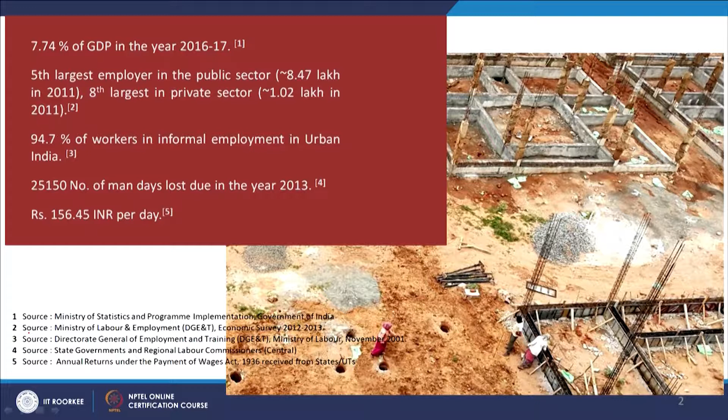If you look at construction as an industry, it accounts for 7.74% of the GDP in 2016-17, and this is the fifth largest employer in the public sector and eighth largest in the private sector. You can see here about the informal workforce: 94.7% of workers are in informal employment in urban India. This is a brief statistic about the kind of informal sector working in these activities. It's not only construction; people work in urban sanitation, in operations and maintenance. So there's a huge segment.

Construction is one of the important segments. That is where we can see the physically woven city, the newly built clusters, demolitions and new additions. But who are making it for us? But where do they live? The way they are making us nice houses, but if you look at the way they live and the dynamics of their housing patterns, it is really shocking.

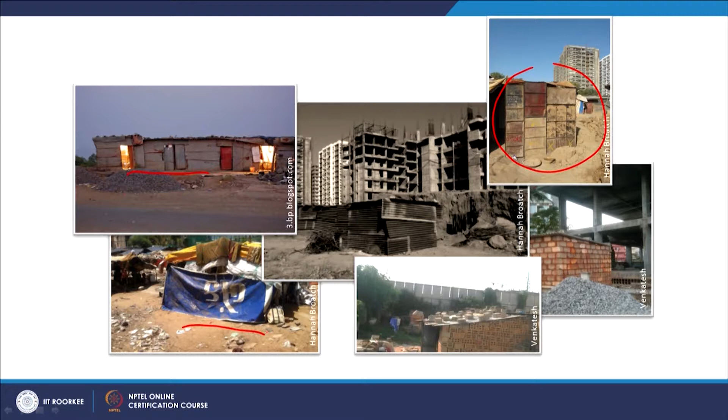What you can see here is construction workers' housing near the project sites. Some are made with shuttering sheets, some are tin sheds, completely like a slum, and some are very temporary structures. In a few places you can find brick so that it could be reused again further. So these are the variety of shelters which you will find.

If you look at the duration, that is again a temporal framework, because it depends on who they are, for what purpose, whether they are skilled or unskilled labor, and how long they'll be on this project. So everything has its own dynamic. How can one understand this whole dynamic situation?

This is where one of my students, Venkatesh Arunachalam, developed his master's dissertation on design strategies for construction workers' housing. This is a recently completed thesis, and I'm showing this because it gives a better idea of the methodology he implemented to understand construction workers' housing and its dynamics, and the potential actors who play in it, as well as various external and internal influences on how it shapes the dynamic environment.

So it not only provides a way to look into it, it also introduces various dimensions: one, how it's not just the architectural dimension that has control of it, there is much beyond it. That is where Venkatesh looks into it, how he collates all the information and triangulates it with one another, and how he develops the design strategies. Instead of showing specifics, I just want to introduce my own student's work, where he developed a very intensive study, especially in an Indian context.

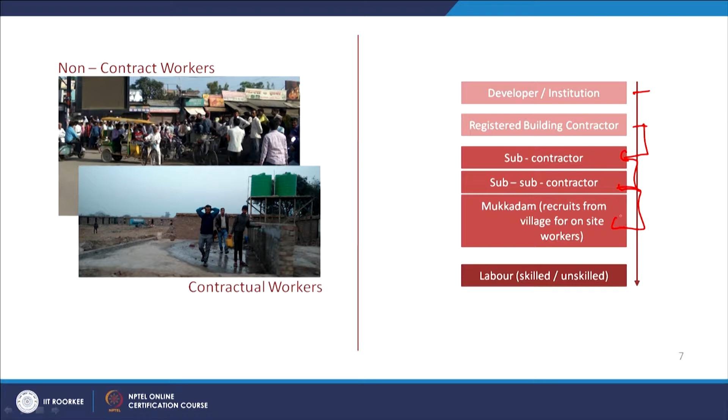For example, in many cases, a group of 100 workers is brought from a Bihar village or some other place in Bengal or Orissa, and the Mukkadam is the leader within the group of villagers. He brings all the men for a period of 2 or 3 months, and they stay here and then go back. They are trained in that particular work, do that work, and go back, and that's how they keep rotating in that whole process.

So there's a kind of local leader who is associated with the contractors and subcontractors, and that is how the whole chain process works.

In terms of social security and living conditions, there are two sides - the off-site provisions and the on-site provisions. For off-site, people tend to reside under flyovers or on pavements or street edges, or they might temporarily stay on government land, or start a new slum altogether. Whereas on-site, they provide a space for these construction workers, which reduces their proximity issues.

A construction worker is aligned throughout the project, but it varies by stage. The first is project conceptualization - once you conceptualize, you know the magnitude of the project, the scale, and the duration. So how can you procure the land? It's not only the land you plan to build on, but how you can accommodate your construction workers - that is also an important aspect.

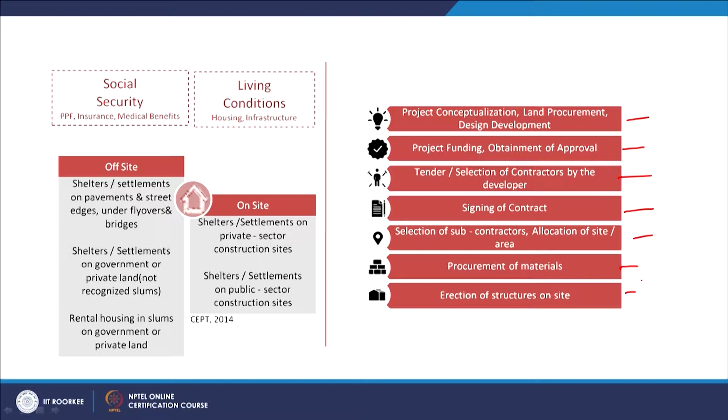Then comes design development, project funding, obtainment of approval, selection of contractors, signing of contracts, selection of subcontractors, allocation of site, procurement of materials, and erection of structures on site. Hannah from CEPT University categorized how you actually tender a project, assign the work, and erect it.

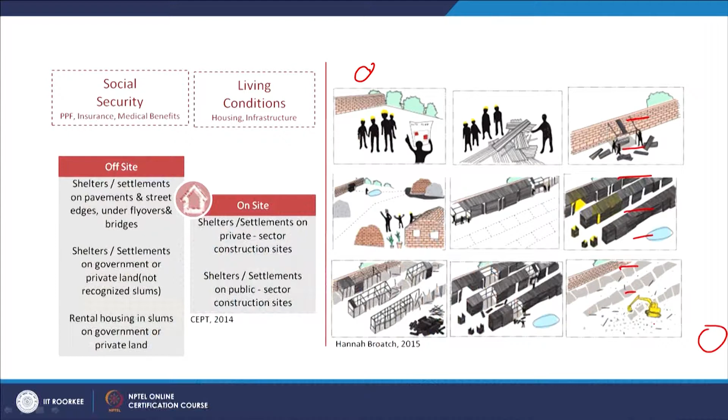This whole process goes from conception of a project to the end of the project and to the demolition of the whole cluster - starting from selection of contractors all the way through. So this is a process.

To understand this, one has to bring the project management dimension into it, because if you really want to work out the logistics, you need to understand what phase of the project it is, what is the duration, and what kind of skilled labor you need at that point - for example, brick masons at the time of structure work, or concrete and shuttering workers.

When I'm talking about construction workers, I'm not talking about specialized carpenters or specialized HVAC people, but the casual labor who does all these mason-type jobs set up by this process.

One has to understand that at the foundation level, foundation to plinth needs a different requirement. From plinth to structure needs a different requirement, then the slab needs a different requirement, and then the finishing of structures - walls, walling material, and the perfect finishes like plaster work - that's a different requirement. And then any kind of services is yet another different requirement.

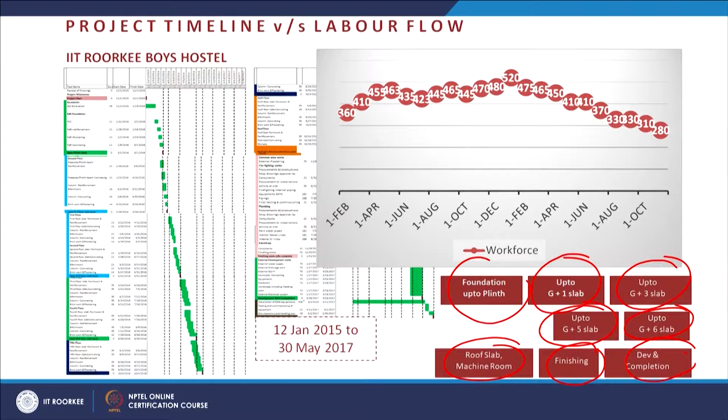So if you look at the inflow and outflow, it goes on from 360, and then it goes up to 520 at some point, and then it comes down, because as it approaches the completion stage, obviously it comes down. So the peak point is when they are actually developing the structures and the whole walling aspects.

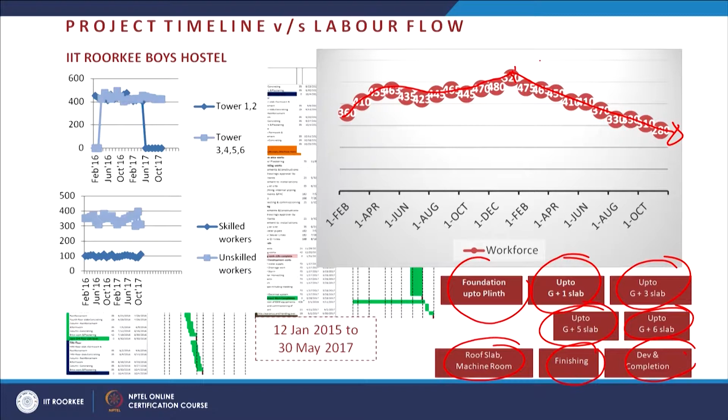And similarly, this is how one has to relate the project management aspect with the timelines. So that is one aspect which Venkatesh tried to look into.

And then when we are trying to address this holistic issue, which was not well addressed so far, one has to look not just at a case study or 2-3 units or any camps and come to a conclusion. So for that, what we did was I asked Venkatesh, and in fact the jury members also asked him, to go back and look at the standards, the basic codes, what our manuals talk about.

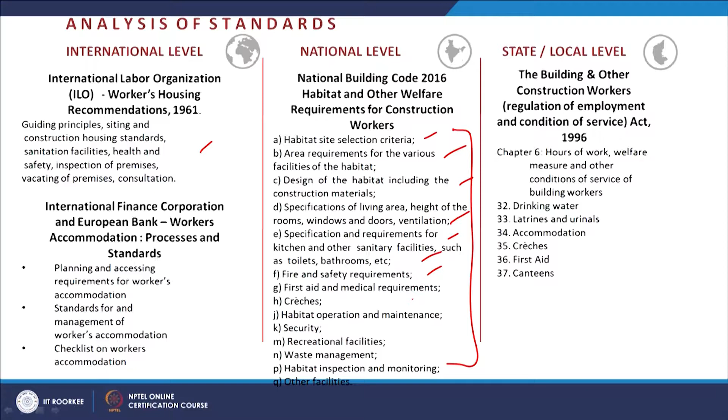So that is where he looked at various standards like the International Labour Organization, how they framed the guiding principles and housing standards, at the same time the NBC, the National Building Code, and how they talked about habitat selection criteria, area requirements, construction materials and areas, kitchen, toilets. And then again you have the Building and Other Construction Workers Act of 1996, which talks about hours of work and welfare measures. So all these we have at the international level, the national level, and the local level.

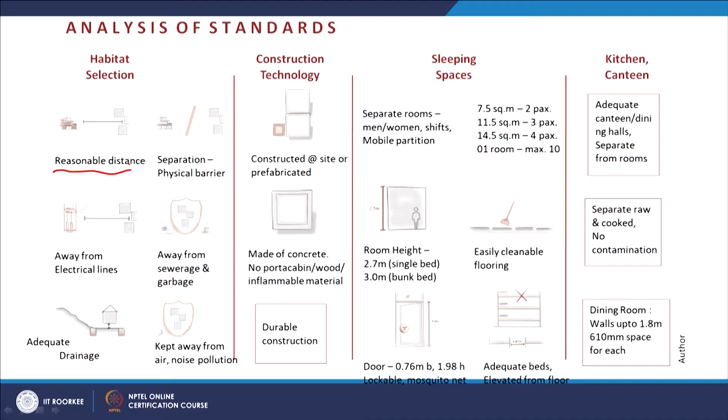But let's see what they are going to talk about. In fact, when we talk about habitat selection, they talk about reasonable distance. So what is reasonable? Is it 1 kilometer, 5 kilometers, 15 kilometers? What is reasonable? These are all more qualitative standards. Now when we say away from electric lines, how far should they be? So this is where one needs a kind of indication that yes, if this condition exists, this is what we need to do.

And adequate drainage - again this is in qualitative terms. What is adequate? How much population? What kind of flow patterns do we have to give? What kind of water storage do we have to give for how many people? So this all talks about numbers, but the reality of these norms doesn't mention much about these precise figures.

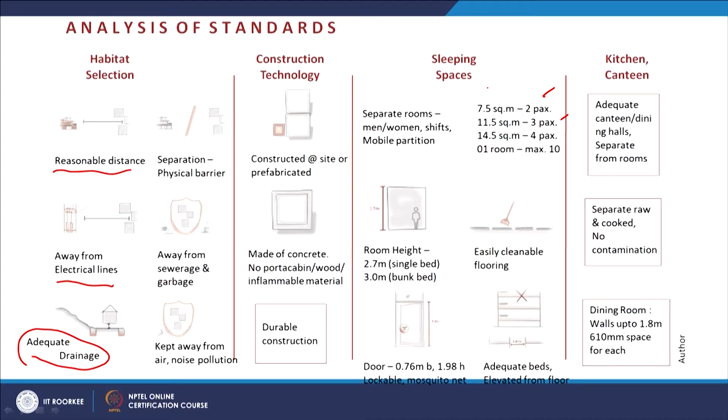As we talk about sleeping spaces, they specify for 2 people 7.5 square meters, for 3 people so much. So basically they have given some broader area requirements, and at the same time they talk about the heights, and again the health and safety aspect of it.

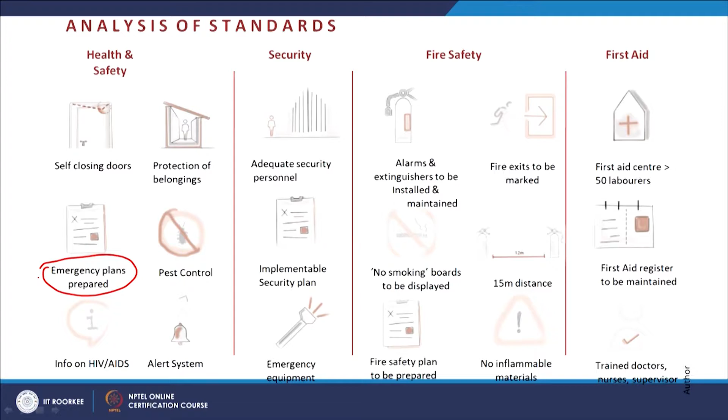So when we talk about emergency plans being prepared - have you ever seen, at least in the Indian scenario, how many of these constructions have emergency plans, how to evacuate if there is a fire or gas blast, pest control, and some information on HIV awareness. So there's a variety of aspects on health and safety, security, fire safety, and first aid - if anything happens, how are they trained to cope with the immediate relief.

And similarly, they have the domestic aspects - water, how much water we have. We have to talk about adequate supply of drinking water. What do you mean by adequate? For how many people, how many gallons of water to be provided? And again, the distances between the toilet and the urinal. So that is where we have to talk about the sanitary aspect and the drinking potable aspect, how they have to be aligned.

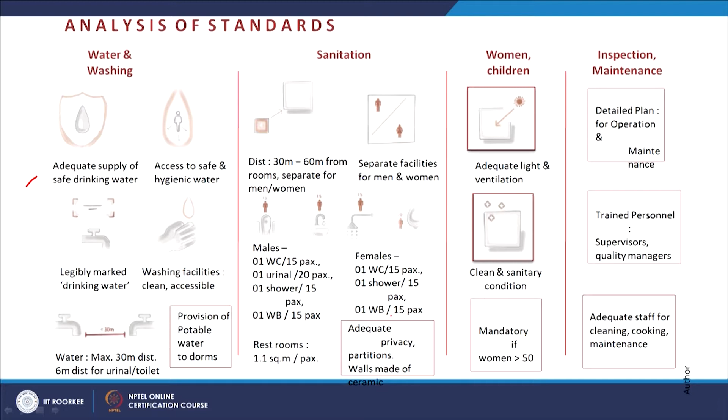And again, we have standards specifying how many WCs per how many people, for male and female. But it doesn't talk much about children. And whereas, again, adequate light and ventilation - how much? Because that is the precise nature one needs to come up with.

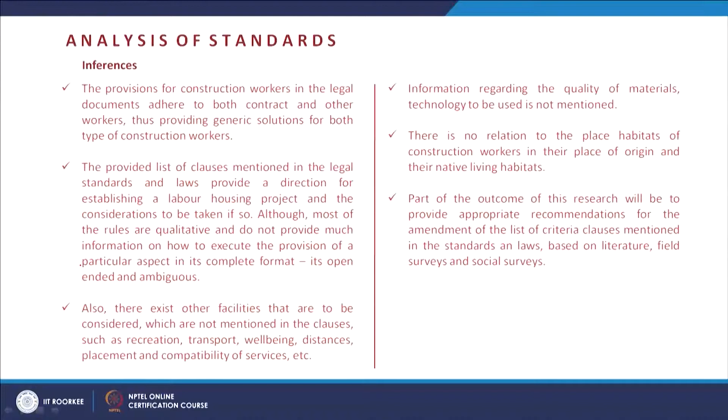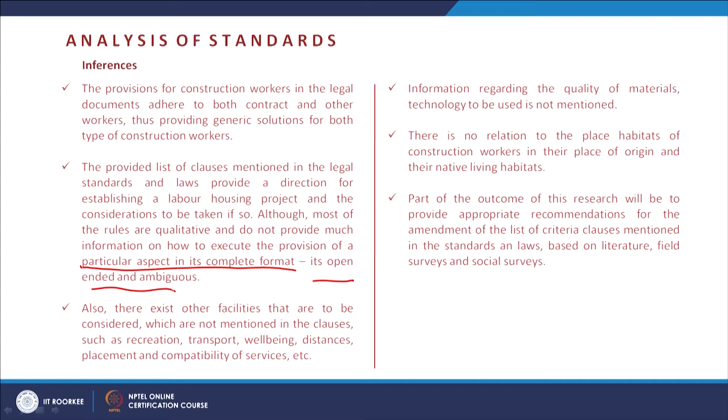In fact, all these provisions and inferences don't talk about a particular aspect in its complete form. Rather, it is open-ended and sometimes ambiguous. So the designer, when planning any particular project, even for the construction work report, finds that the standards don't help him in a complete manner.

And then what he did was collect a variety of contracts, both from public and private projects and agencies, like NBCC - National Buildings Construction Corporation Limited - and CPWD, the public agencies, and DMRCL the Metro, and UNDP - United Nations, Municipal Corporation of Mumbai, IIT Indore, and Griha.

So a variety of contracts, and then Gammon India. So all these he has analyzed. The way he analyzed was, he identified the concerned text in the contract between the client and the contractors, what the actual text mentions about construction workers' housing, and then highlighted some of the important points that talk about a pertinent issue or aspect.

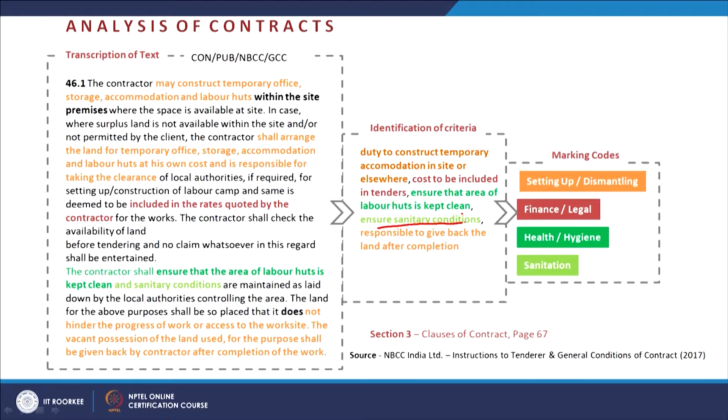For instance, you can see where it talks about ensuring the labor huts area is kept clean and ensuring sanitary conditions. That talks about health and hygiene, whereas the dismantling talks about in site or elsewhere, and here we talk about dismantling versus sanitary condition.

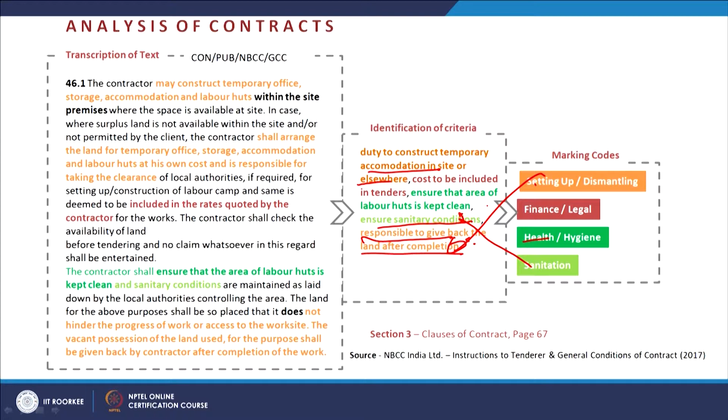So basically, he's doing a kind of content analysis. Through the content analysis, he identified and categorized them into codes, and then tried to relate what emphasis has been laid out, which gives us the minimum priority items like construction material and technology, women and children, recreation and regeneration, kitchen, cooking, and accommodation. But there are also certain loopholes identified, as I told you, about what kind of precise spaces we need to give, and the typology and areas required.

Apart from this, there are also acknowledgements of various research projects and some prototype developments in the same domain of construction workers' housing.

Renu Desai and Sachin Soni talked about housing conditions, and you can see how people dwell under the flyovers. And in SPA Delhi, they talked about a kind of product orientation of how we can unpack and pack the things.

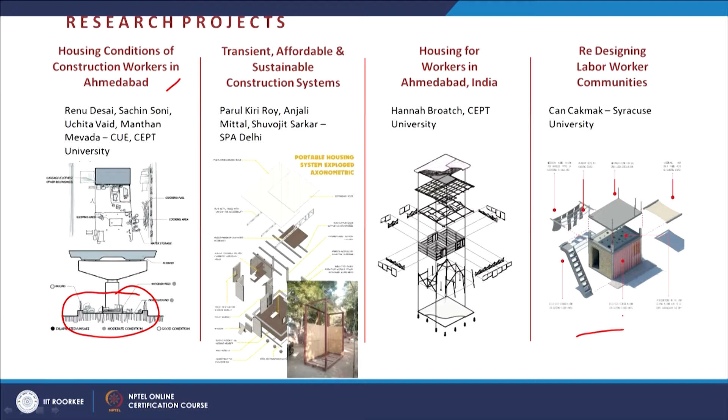Similarly, Hannah Broatch's work also talks about this. But most of these works talk about the prefab components, how we can easily take them out and reuse them elsewhere, and also how we can reuse waste materials for producing meaningful and profitable material choices. So that is where we talk about prefabrication as a viable solution. That is one way of looking at it.

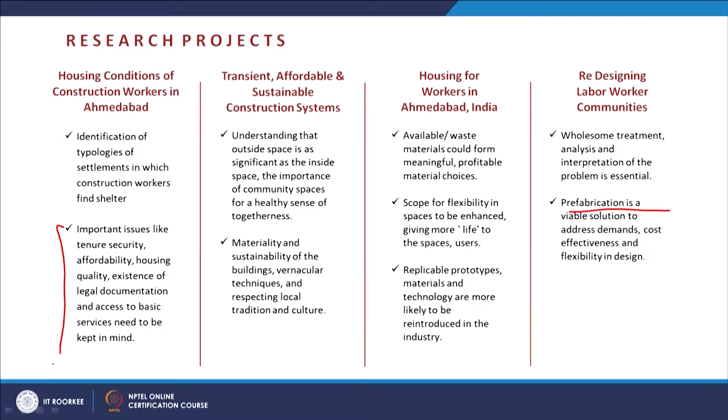On the other side of it is the tenure, security, and affordability. So apart from these transition shelters, there are also some permanent outcomes, such as those built by Costford. You can see all these in Kerala and Abu Dhabi, where they built a whole society of housing for construction workers, the permanent housing.

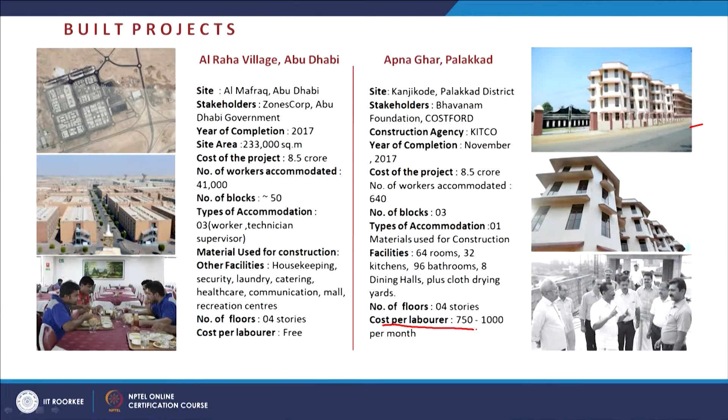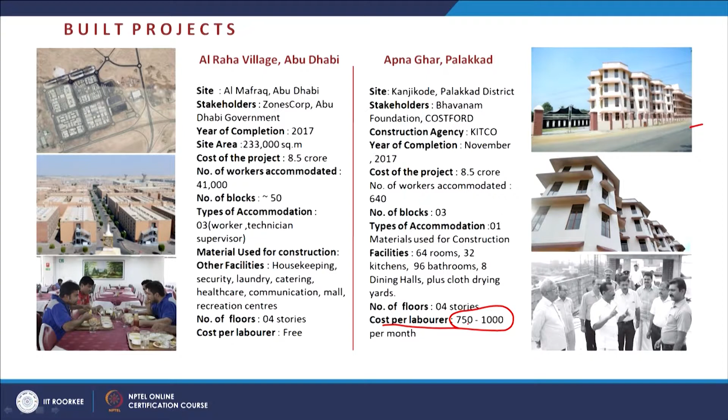But one of the problems with this is, once the area is built, how do they actually travel? The commute also becomes a problem, because they have to be at the construction site for months and months. If you look at it, the cost per laborer is about 750 to 1,000 per month, so it's basically a kind of contribution that a laborer also gives toward his permanent dwelling. So there are different models that we have discussed.

And then to understand the reality, some educational institutional buildings, ongoing institutional buildings, and private universities, as well as private developments, have been visited and recorded completely. A thorough recording has been done covering the project management dimension, the social dimension, the cultural dimension, and the financial dimension. So the various dimensions have been recorded.

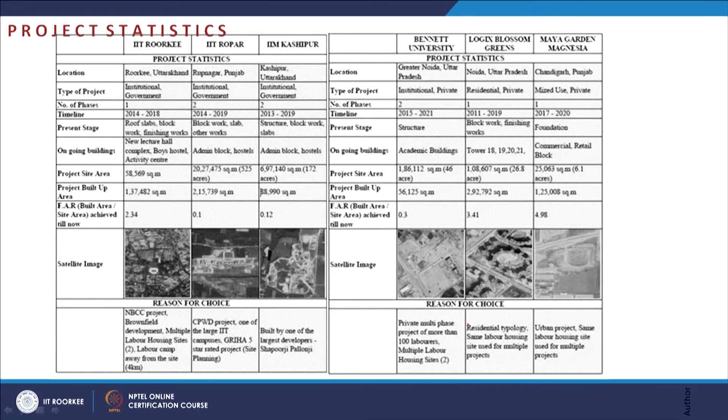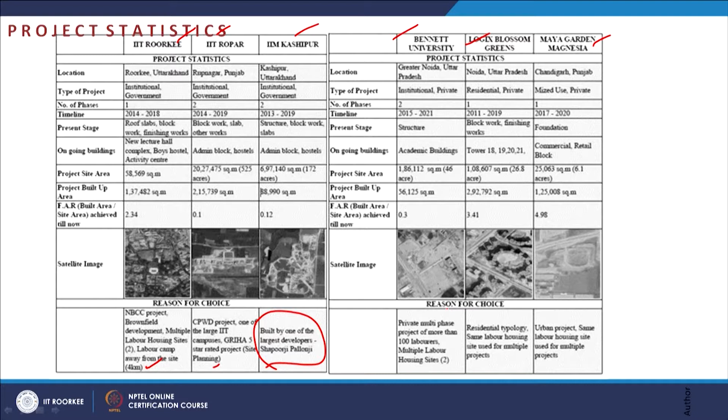For instance, if you look at a comparative analysis of IIT Roorkee, IIT Ropar, IIM Kashipur, and private universities like Bennett University, Blossom Greens, and Maya Garden — two of these are done by NBCC and CPWD, but this one is by the corporation, Shapoorji Pallonji company — these have been done for the same labor housing site used across multiple projects. So we have got a variety of understanding of how various projects go on.

And what Venkatesh tried to do is basically bring out a relationship between the camp area and the built-up area, and in association, what proportion a construction worker's space should be attached with relative to whatever we are building.

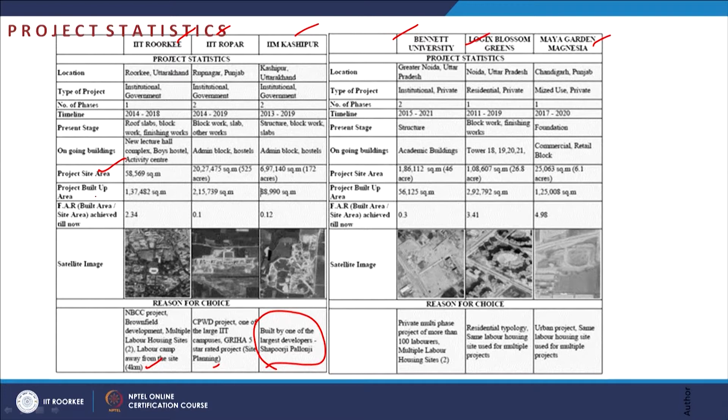So if you are talking about 10 acres, then how much should it be? Within 10 acres, if the built-up area is 35-40%, then according to the built area composition, what proportion can we bring down to an understanding of how much construction workers' area we need? That is where you can see the camp area site. And if you look at the previous one, you have the project site area and the project built-up area, and that is where you can see the FAR and other things.

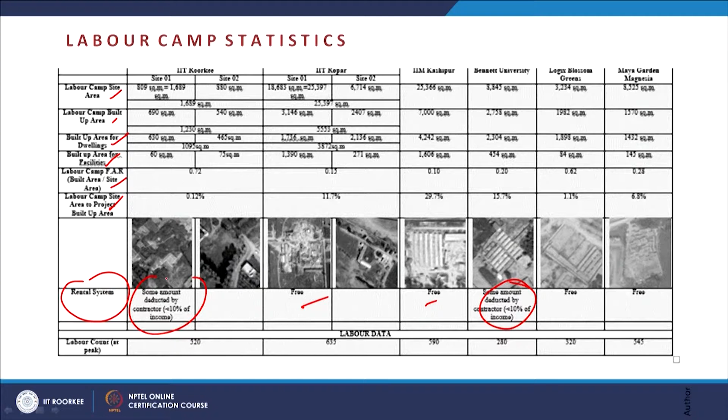So with that, if you analyze the camp area and the camp built-up area, and at the same time the built-up area for dwellings and facilities and the labor camp area, this is where you can see the rental system—here you can see they have been deducted. And then what is the capacity? So that is where the labor count comes in.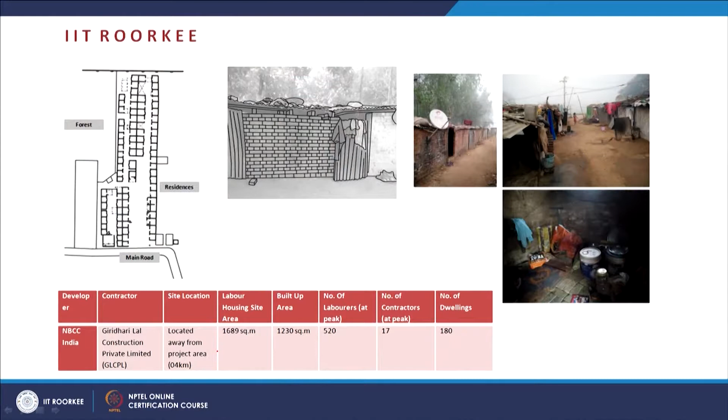So then what he did was he actually mapped everything, all the layouts of it, and what are the activity patterns and what are the material contributions into it. So you can see a small cafe there, the material yard here, and the open defecation and common kitchens. This means you can see the proximity—the kitchens and these open defecation areas are very much nearby.

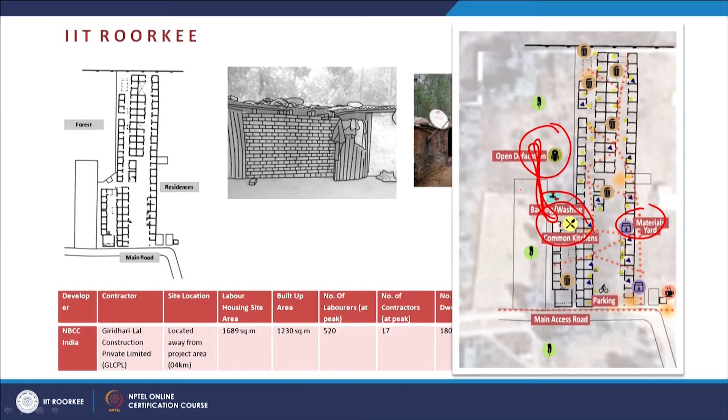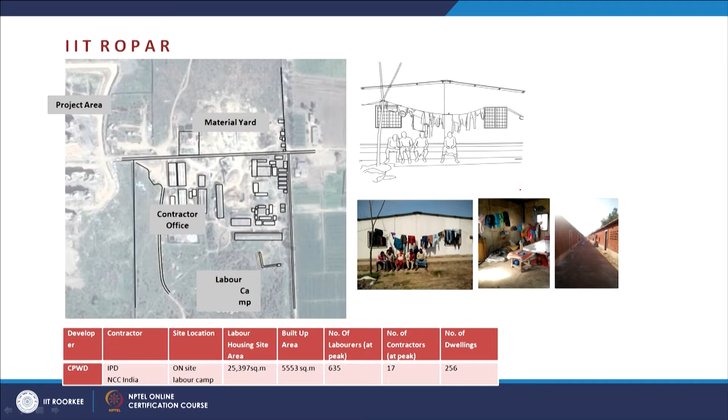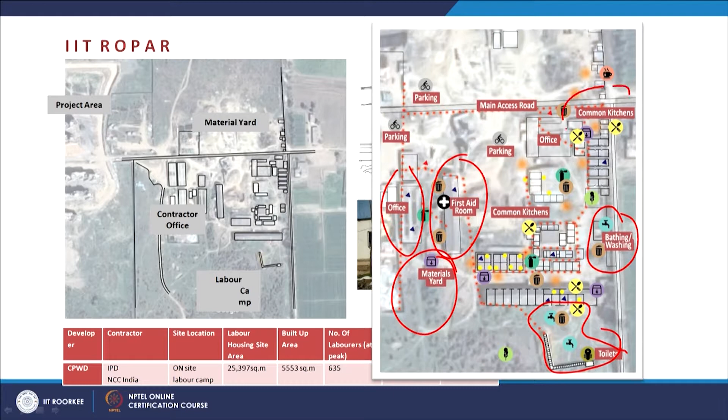So that is where he mapped all the aspects of their living and how they are segregated by the division of contractor, the subcontractor's house, as well as the local skilled labor's houses, the family dwelling units, as well as bachelor's dwelling units. You can see there's an office here, a first aid room, the materials yard, and you have the drinking water and the toilets, bathing and washing, and the common areas—basically how the service areas are also categorized in every settlement.

And similarly in IIM Kashipur, so he recorded all the areas, calculations, number at peak, what is the number of laborers, and then number of contractors and the number of dwelling units, and how their activity patterns are decided.

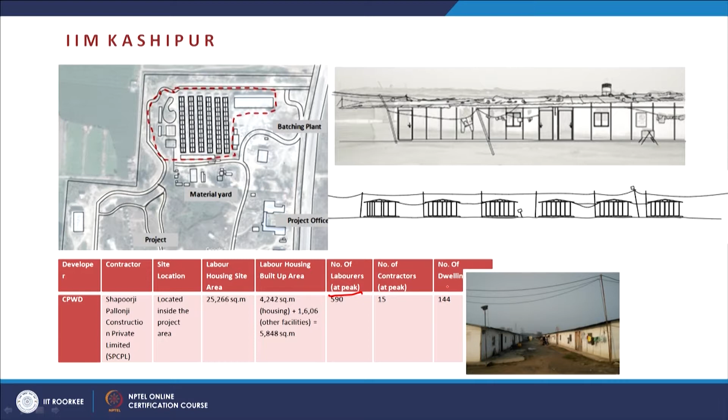And you can see here, for instance, the crèche and the material yard are very much nearby. But look at the safety aspect of it, because the poor children will be playing there, and suddenly a lorry comes and dumps all the pebble, and there are no barriers or nothing to protect them. So that is where one has to see how we can give consideration for these health and safety aspects.

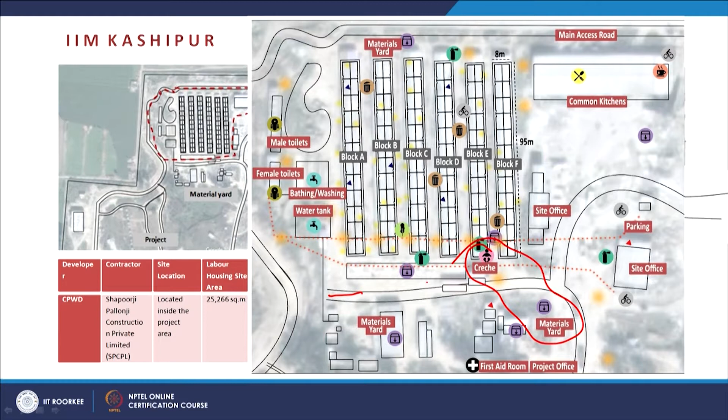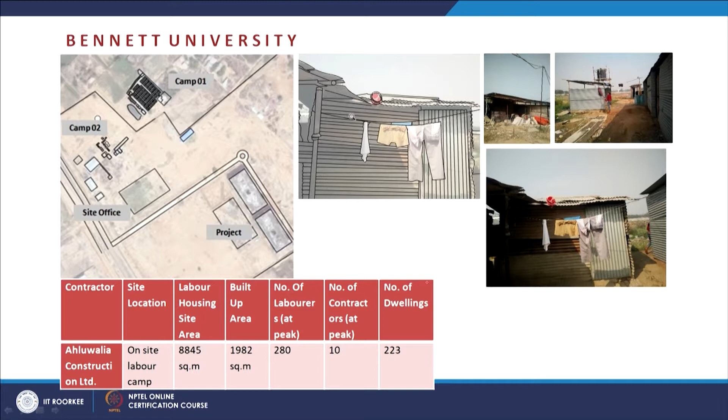And the activity patterns are also important. Similarly, you can see how camp 1 and the incremental processes went into it. So like that, he actually mapped all the spatial layouts into it.

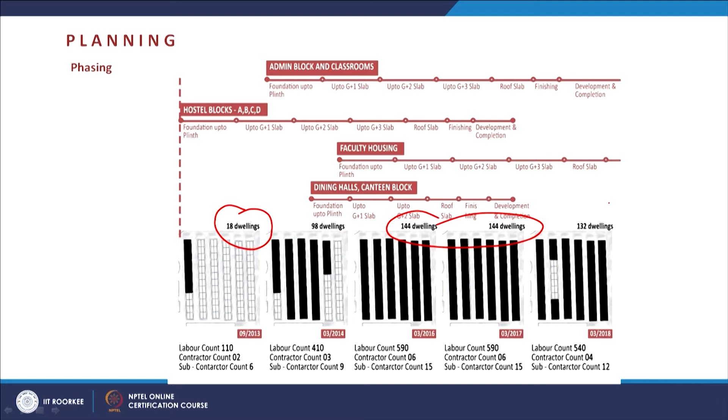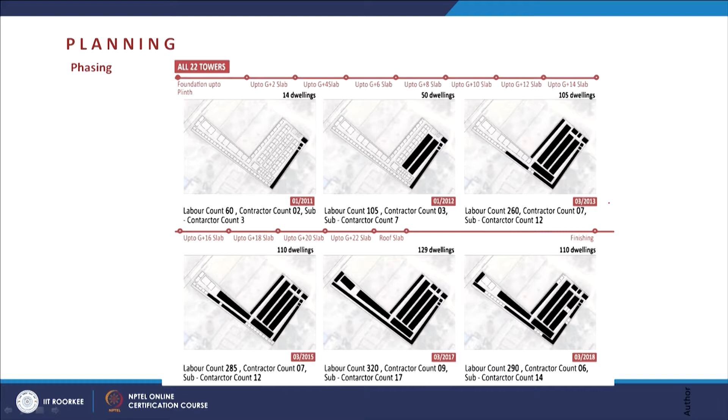But now when I brought the project management aspect into it, you can see that as the project is progressing, the construction workers and the number of housing dwellings are also progressing—started with 18 dwellings, then it goes on to 144, and then it started reducing. So in a span of 4 or 5 years, the count is gradually coming down, and gradually they keep moving to other places. So you have to understand at what level, what is the requirement, and how these people are migrating. That kind of understanding will also give a thorough understanding of what kind of spaces you need to provide, what kind of services we need to provide, and when, and how much.

Now when you talk about culturally responsible environments, that is where ethnicity also comes into the picture. Most of these people come from nearby villages, or at least from one locality, who are hired by a local contractor. And if you look at it, you can see he mapped even the ethnic origins—Bengal or

MP—where they tend to stay nearby places, they try to stay together, and that is where a sense of community is born. But obviously, most of the difficult things in these settlements is that they often get disputes from one community to another community. That is the most frequent issue they face. So you can see how they are staying together in clusters.

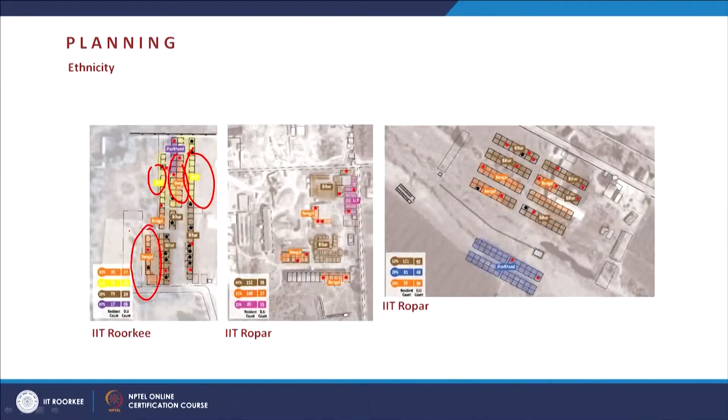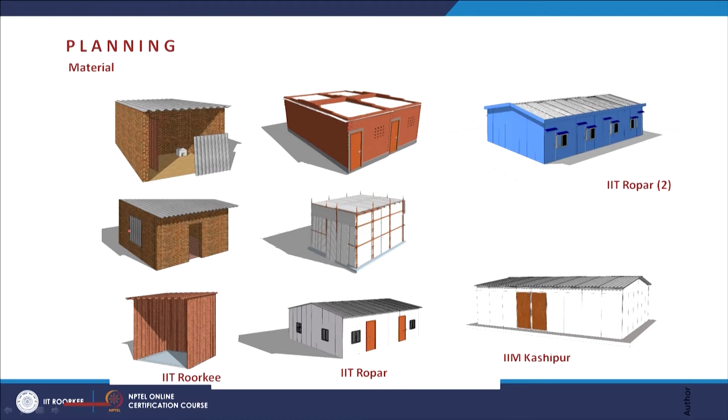And similarly in IIM Kashipur, everywhere you can see people—mostly they're coming from Bengal, Orissa, Bihar, Jharkhand, and UP, and in some places they have MP also. And what are the distances they have to travel for their defecation, their kitchen—most of them have a shared kitchen concept, but in reality they also set up their own kitchens outside. So it's also a kind of understanding what kind of materials—you have tin sheets, brick, sometimes you have prefab materials.

So one aspect you have to understand is, the moment you are thinking of the site, what site you have to provide for them—because imagine your project is in the heart of Delhi or the heart of a city. Obviously it is very difficult to find a living environment for them, especially with the land price. That is where circle rate and valuation techniques have to be accommodated—what is the circle rate in that area, and how far you can get another place for them to live, so that they don't need to travel 30 kilometers, 50 kilometers every day for their work and go back.

In that case, then what kind of transportation facilities you are providing, what kind of work shifts you are providing. That is where valuation also comes into the picture of understanding the land economics of it.

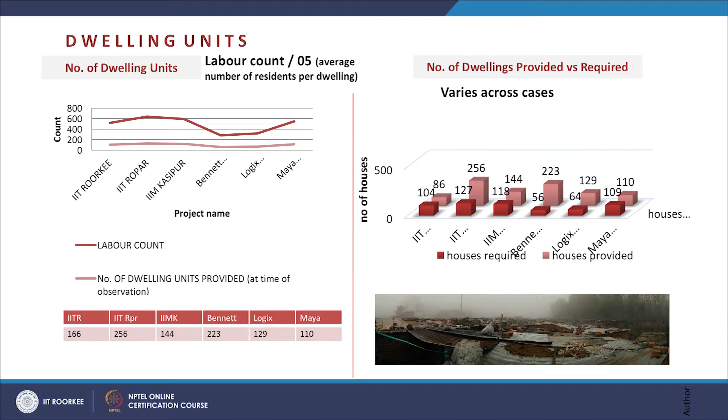As I said, in each case, the labor count, the number of dwelling units, the requirement goes on up and down. There are a few mapping of inside the rooms, what kind of multiple purposes which they use. A small room could be used for multiple purposes, it could be a kitchen, it could be a sleeping room for many people.

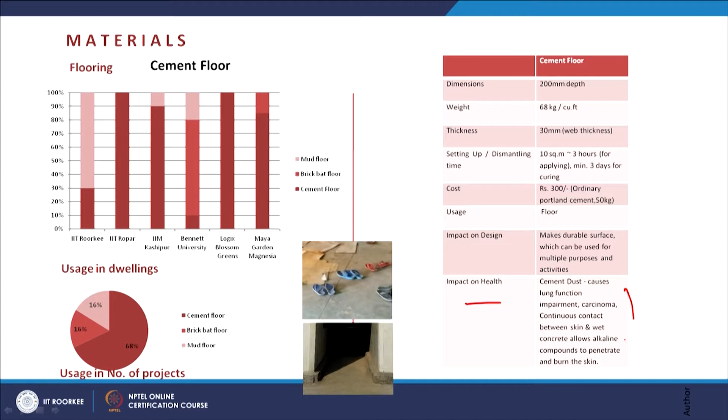The materials are also analyzed, what is the cost of these materials for setting up as well as dismantling, and how much impact it will take. For instance, if you talk about cement, it causes lung function impairment and also some kind of skin diseases. There's a lot of issues with the materials.

In terms of the planning, what we did was all the case studies have been brought and compared with the standards. Like for instance, if you talk about average number of houses, what the standards talk about, and sometimes the standard doesn't talk about it, it only qualifies it but doesn't quantify it.

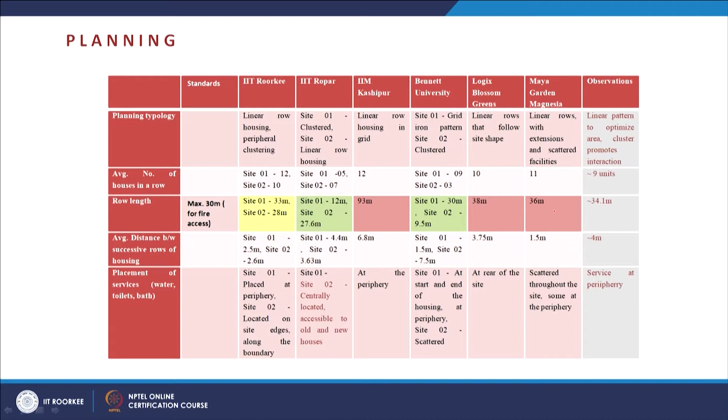So that is where when you talk about how the existing scenario is there and how we come to the observations, and how we can do placement of services, water and toilets, because they vary from construction site less than 10 acres and more than 10 acres, and how different requirements are needed for smaller and bigger construction sites.

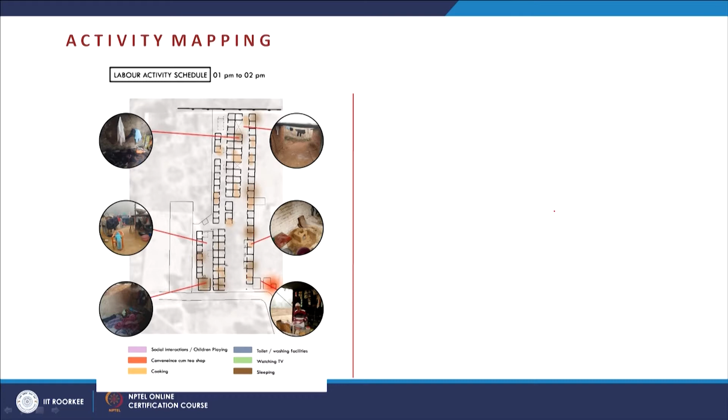So this activity, the whole activity mapping has been done at various timings, from 5 to 8, 8 to 10, and he mapped out staying with them in a participatory way, understanding what is the dynamics happening in that space, where the women were spending more time, where the men, where the children were spending time, and comparing the various material proportions, how it will cost, and what are the cost implications.

What are the impacts on health, what are the impacts on design, all these aspects into it. And then again, from the contracts, from the standards, from the contracts, what is the kind of design inference which he is getting. So that is how the service infrastructure also has been assessed.

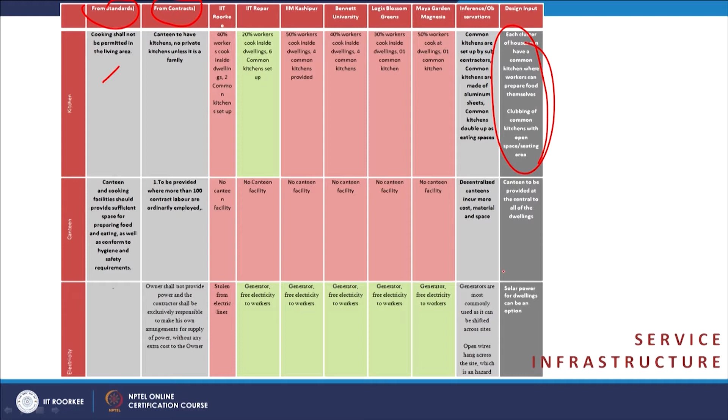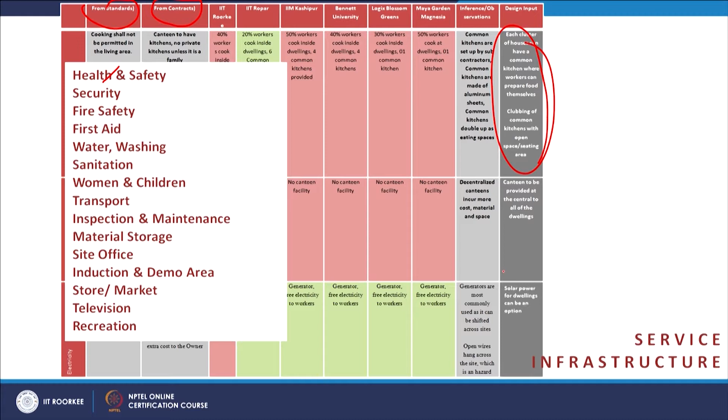A comparative analysis with parameters from the standards, with the contracts, or with any particular guidelines which we have, and with the existing case studies, so that we can infer through the design. That is where we talk about health and safety, security, transport, material storage, the site office, store, market, television, recreation. There are some other models also which we have, like ATMs, portable water ATMs sort of thing, solar lighting, and toilet systems.

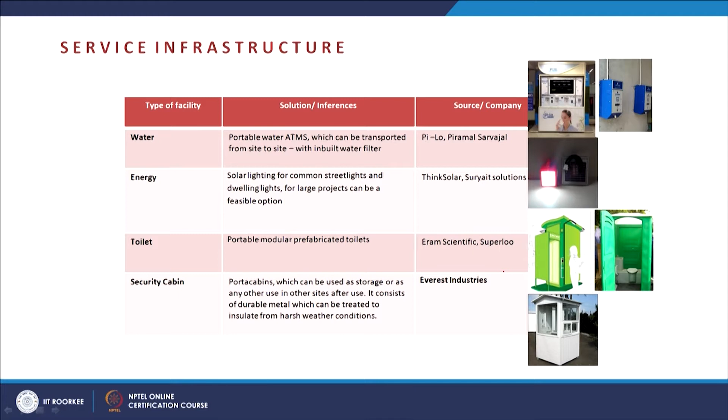So all these, we do have some options in the market, and how one can negotiate it with the project and how it could be, that has to be worked out. Similarly, the social response, how the users are feeling about those spaces, all the social surveys have been conducted.

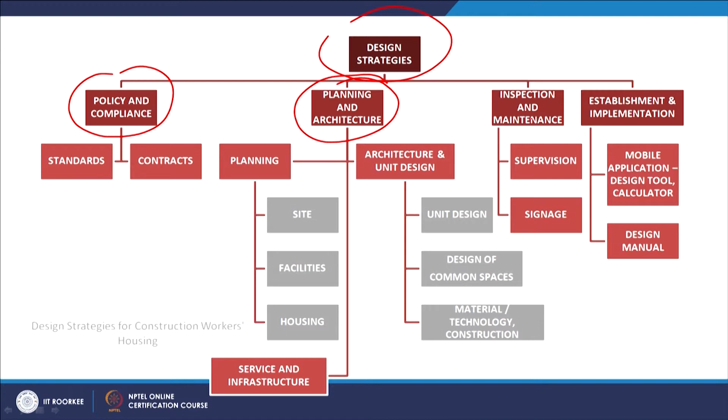So after an intense survey into it, then the design strategies were developed. In fact, the design strategies were classified into 4 components: one is at a policy and compliance level, the planning and spatial level, planning and architecture level, and the inspection and maintenance level, and the establishment and implementation level.

So what he did was, at the policy level, he thought of addressing some changes in the standards and the contracts. And then in the planning and architectural component, starting from a range of unit design to the settlement level, and then the supervision and the signage.

And here at the end, what he did was he developed a kind of mobile application. If anyone wants to refer, it's a tentative application, but anyone can just put in their built up area, the location, and the plot area, and it automatically gives you how much labor requirement is probably needed, what kind of housing you need, and what kind of space you need. So that sort of small design manual has been produced towards the end.

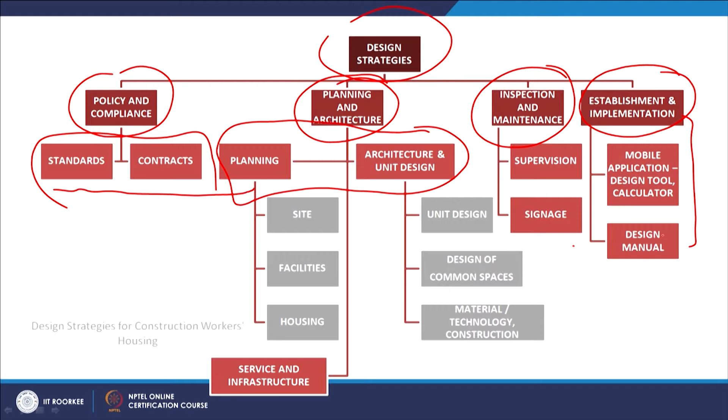So these are the aspects which has been covered in the strategies, I just briefly went through. And so as I said, there are 3 aspects: one is the project conception and funding, award of contract itself. We have to be careful and acknowledge these construction workers, the need for their shelter and facilities, and the budget has to be included in that, and the agreements has to be included in that. So this is one thing which we have.

And then in the spatial aspect, how we select a site. Are we going for off-site or on-site? If it is off-site, where and when and how we are transporting them.

Then strategic planning and allocation. Are we allocating the clusters by gender, by family-wise, by bachelors, by ethnicity? And then the provision of services, how far the distances are, setting up the units and additional services and provisions. At the same time, it's not only the provisions, but how they maintain a culture of safety, how we inspect and organize. And the last one is dismantle, the creation to the taking it out from the site, and how we can reuse it, because that is where the business aspect of it lies.

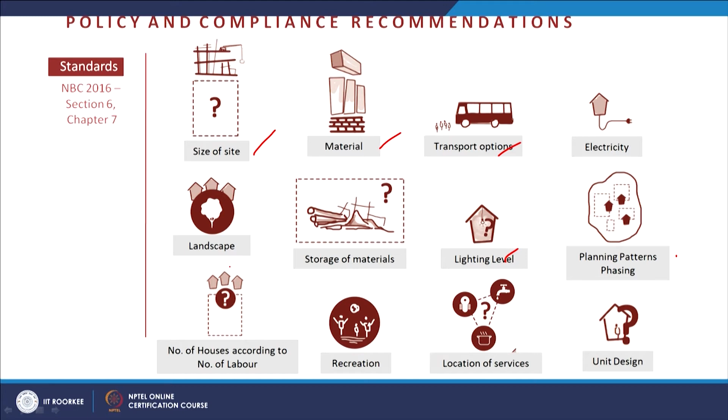So when we talk about the standards, the size of the site, the material, the transportation options, the planning patterns, lighting level, all these things have to be relooked into. And Venkatesh tried to, and in the contracts also, we should talk about the demolition of it.

And the parking aspect and material. So when we talk about the site selection, as I said, on-site or off-site, the cost of rent, the proximity, all these things has to be calculated. And what are the facilities you have?

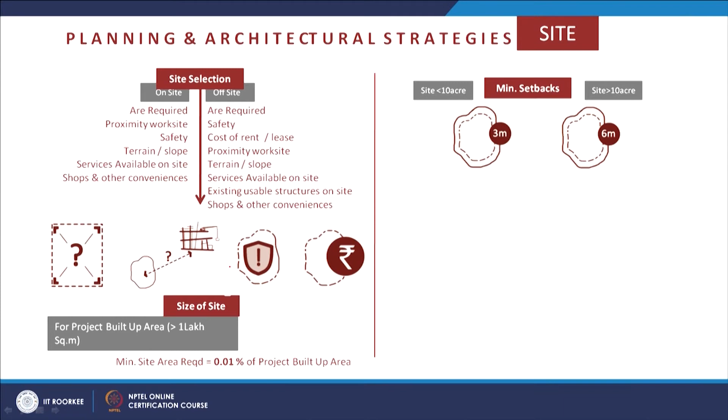And if it is less than 10 acres, the whole dynamics is different. If it is more than 10 acres, then the setbacks and everything will vary. Similarly, the built up area required, if it is 70 to 75%, whereas it is 25 to 30%. So that makes a huge difference.

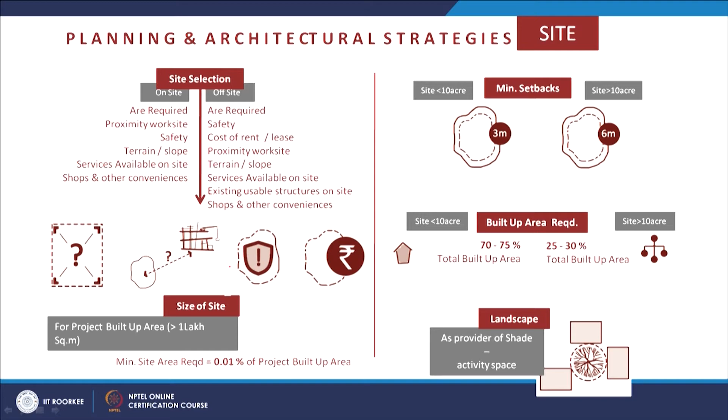And the landscape, how we can actually conserve the existing landscape, and how we can plan accordingly so that it can provide natural shade. And number of dwellings, we are talking about 5 dwellings, and how clusters could be organized and how services could be distributed has been also thought about.

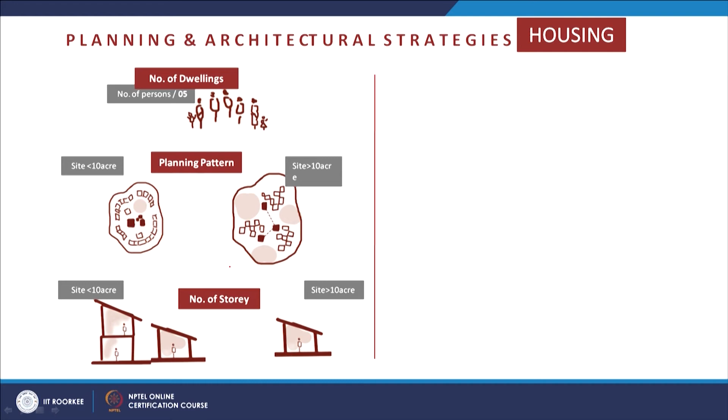And whether we can go for a dual story or a single story, if it is less than 10 acres, because the size constraint is less, whereas in more than 10 acres, you have provisions of having an incremental development, and that is where the option of second floor could go.

There's the phasing out plan, and at the same time, the ethnicity, the single person, the family, supervisor. Some people work in a night shift and day shift, how the dwellings have to be organized. Because the moment the man is leaving their family and kids in the night shift, obviously, how you can place their dwellings matters. So ethnic groups...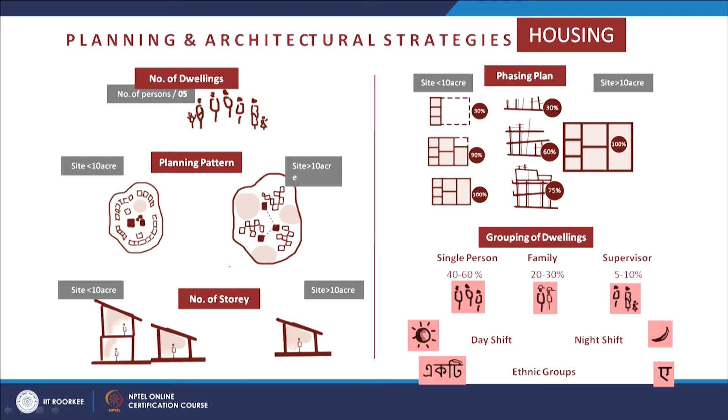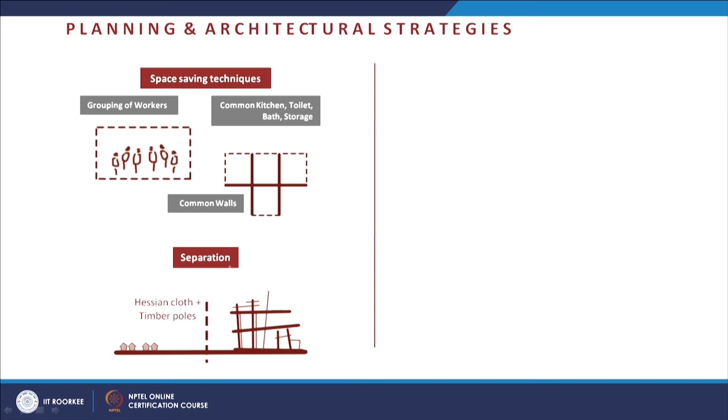And what are the various space saving techniques you can think of, and what kind of barriers we can keep for the health and safety aspects. So all these have been laid out, basically from a single user point of view, the family point of view, and the supervisor point of view.

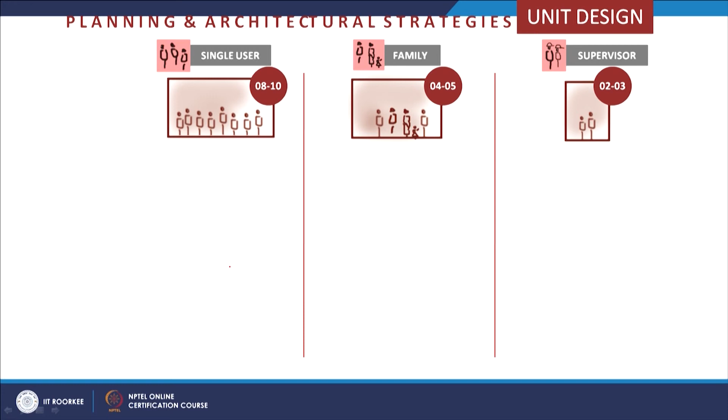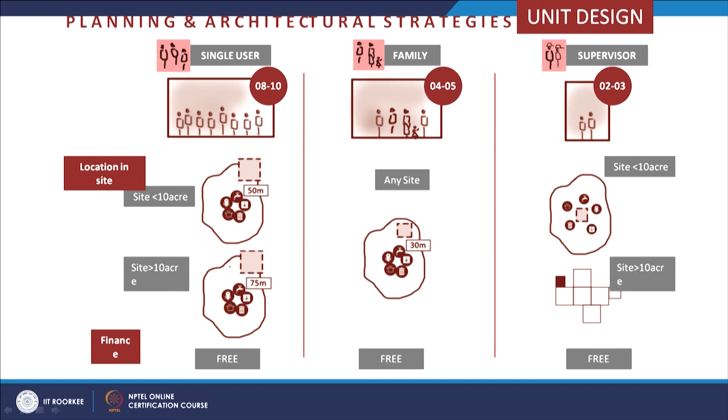And again, it talks about the distances, and at the same time, these are a very, I would say, initial level findings from whatever Venkatesh have studied. But these things could be further elaborated, and these could be further evaluated to make into concrete suggestions to both the policy and as well as the practice.

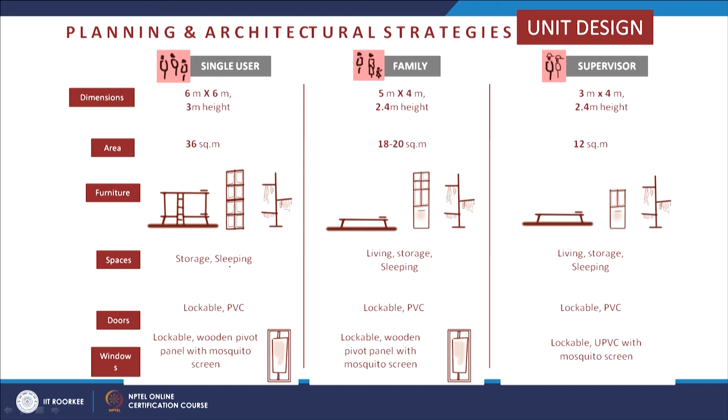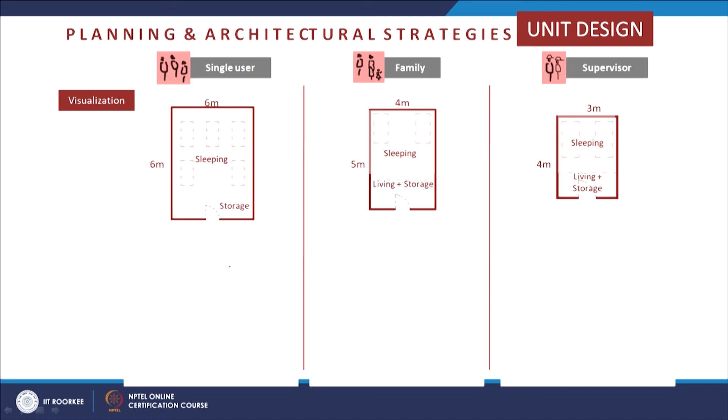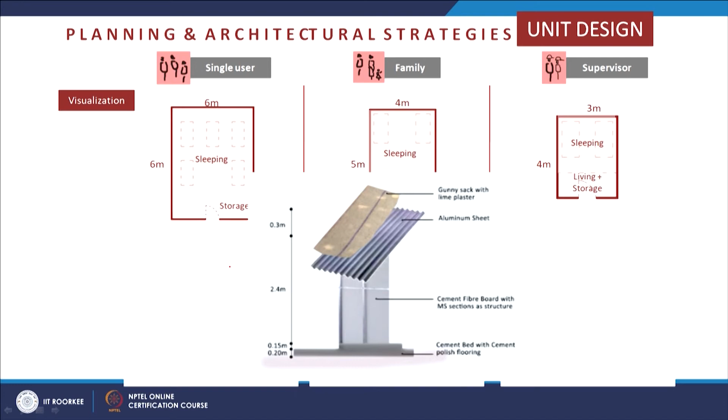So you can talk about the materials and how a small conceptual layout could be laid out, what amount of storage we need to give for them, for each laborer, and the cooking spaces we should give, and the materials which we can give, even a gunny sack with a lime plaster, small indigenous ideas of how we can give a kind of permanent setting.

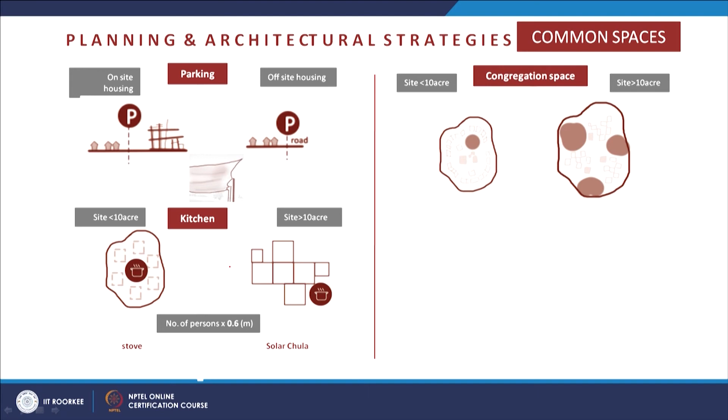So this is just a very introductory part of the design strategies, but what one can understand from this study is the way different dimensions play an important role. One is the project management dimension, one is the land economics, the valuation dimension, one is the social dimension, the ethnic dimension into it, and the way the whole policy level, how the contracts and how the standards talk, the legal dimension into it, and there's the medical dimension into it. There's a variety of dimensions that come together.

One has to understand that. So that is what we say: this is only an academic work. It just showed a way and different dimensions that are to be addressed to understand the construction worker shelter context. Hence, this work is to be treated as a starting point, and it could be further developed to inform the strategic directions in policy and practice. Thank you.